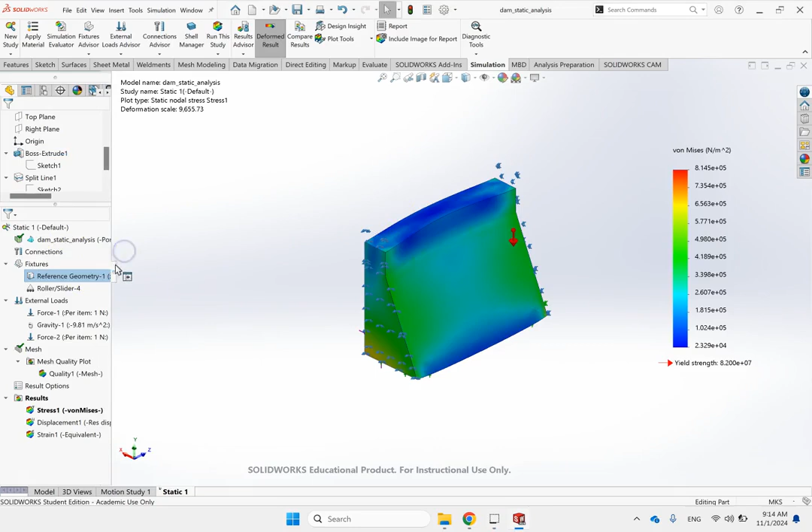Hello everyone. In this video, I want to show you a very simple static analysis of forces on a dam in SolidWorks. And the elements that I want to show you that are new to my playlist are advanced fixture or reference geometry, and a roller, as well as forces that are varying with location. They are non-uniform forces, which is the hydrostatic force behind the dam.

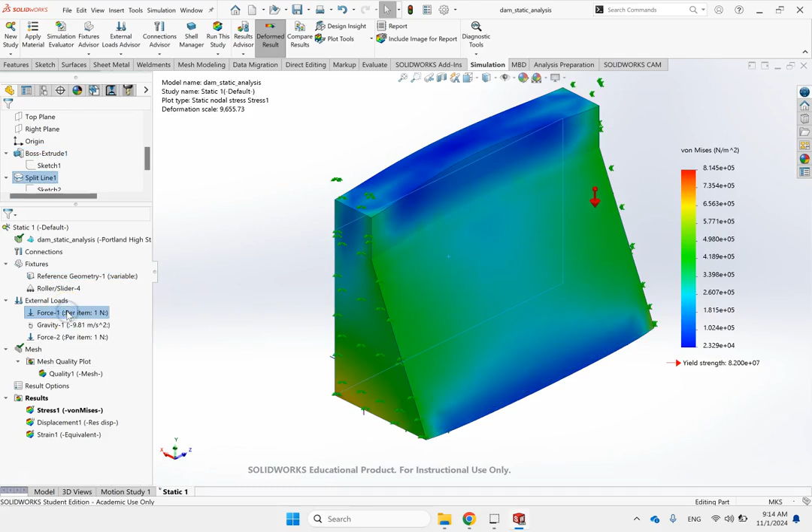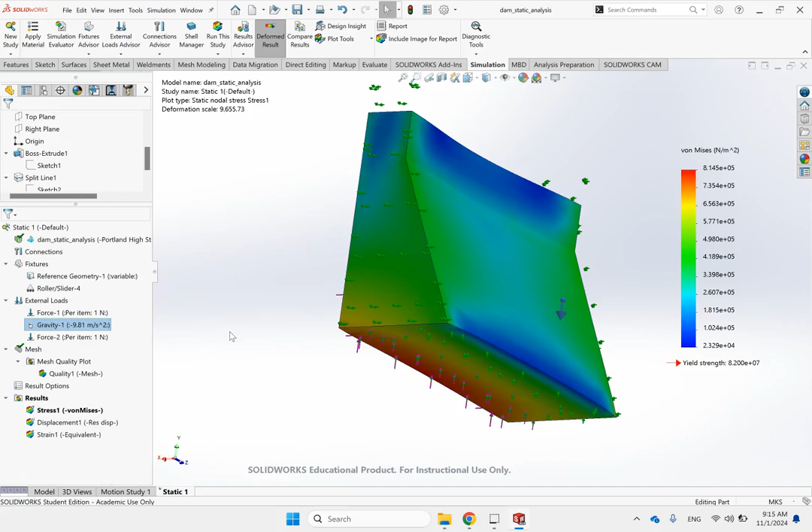Okay, this force here starts at the top of the water from zero and then goes down, and the force is rho g h, where rho is the density of the water, g is the g of gravity, and h is the height, the depth in water. The force that is due to water going underneath the dam, call it the uplift force, which you can see here, starts maximum at this bottom corner at rho g times the total height. Then as you go toward the other end and there is barely any water, that force gradually goes to zero. And of course the gravity.

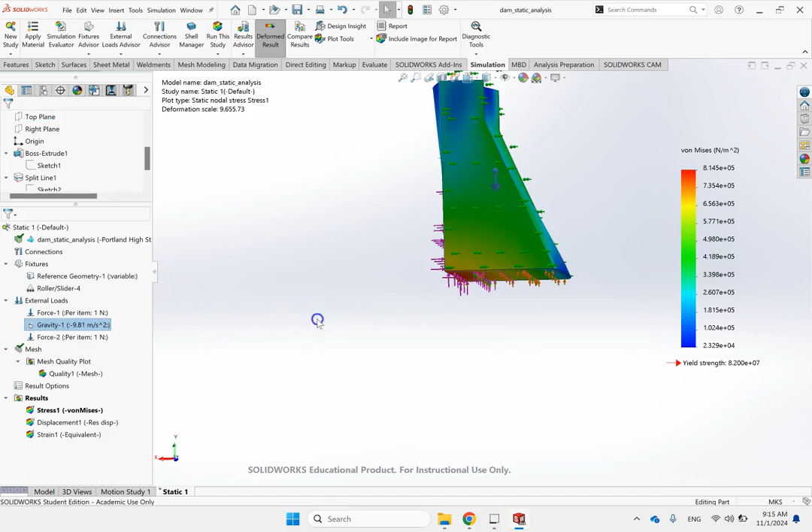So this is that. And one extra thing that I did when I started modeling this simple thing, I was looking at the material, and of course, when you go to the regular material of SolidWorks, there is no concrete. So I was looking into a way to add concrete material to SolidWorks, and I found that if you go to GrabCAD here, this person, I don't know if I can pronounce it correctly or not, Lala, I assume, he or she added this amazing file. So you can download this RAR file and then extract it.

And once you download it, let me show you. So here, it should be this one. Yes. So you need to copy this concrete SLDMAT. It's a SolidWorks material, concrete. It's a custom library. You copy this. And then you go to your program data, and then go to SolidWorks, and then copy it into custom material here. So that is going to add this custom library.

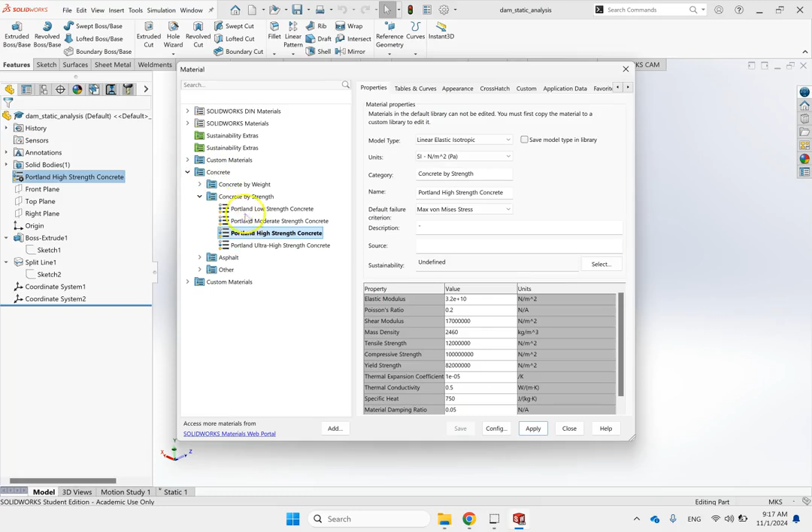So now if you go to SolidWorks, when you right click and you want to edit material, you should be able to go under custom material, and there is this library now called concrete, and there are several categories. There is even asphalt. Okay, and there's concrete by weight and concrete by strength. Here I used Portland high strength concrete. So this is another interesting thing that I wanted to add to this video.

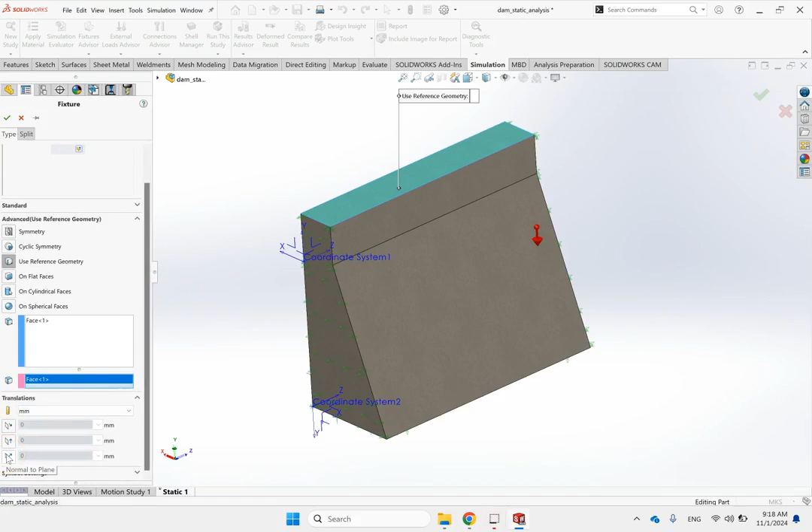So now what are my constraints here? On these faces, I added what we call an advanced fixture. So you go to advanced fixture, and then you need to pick a surface, let's say this surface. And then you can pick a reference. Let's just pick the same thing for reference. And then there are 3 directions for displacement, and you can constrain any of them to 0 or a fixed number if you want. So if I do this, in this X direction, all of the displacements will be set to 0. And then I can add this direction, which is Z. And now in the Z direction, everything is 0. But in the Y direction, everything is free to go.

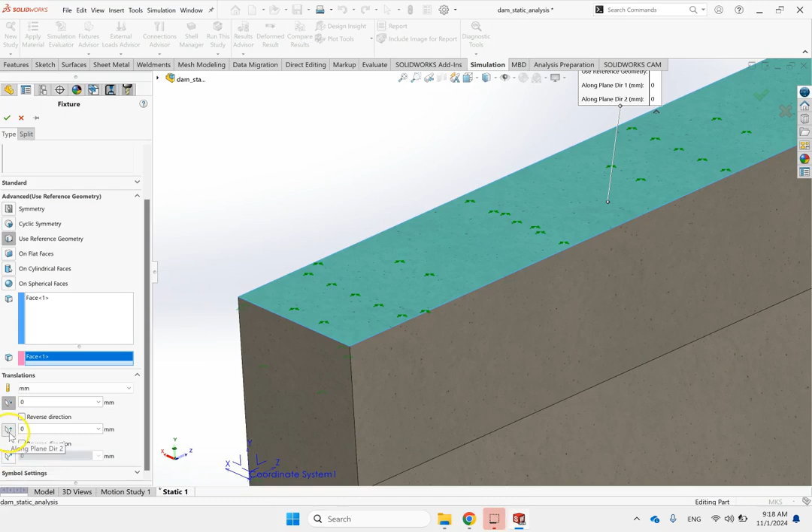Okay, so you can basically eliminate any of the degrees of freedom that you want with this custom fixture, because if you add the fixed geometry, it automatically takes all 3 away. If you do roller, then only the translation normal to the surface is going to be 0. But with this advanced one, you can do any combination that you want. So that's what I did to these 2 left and right surfaces.

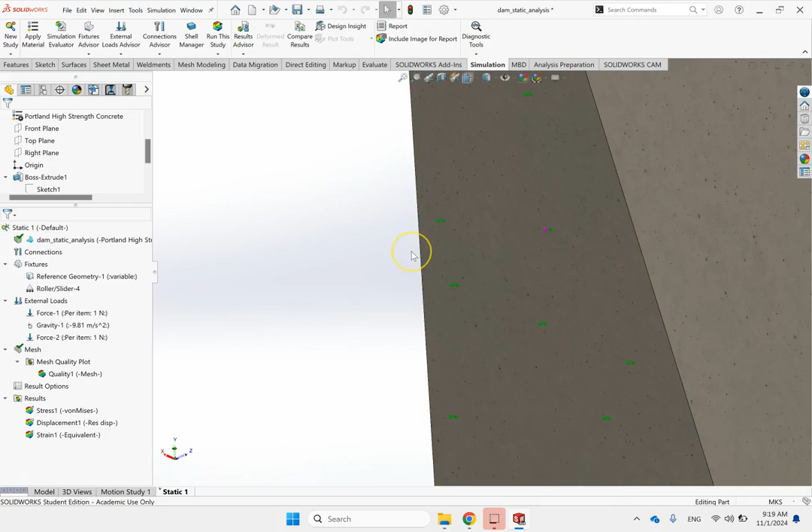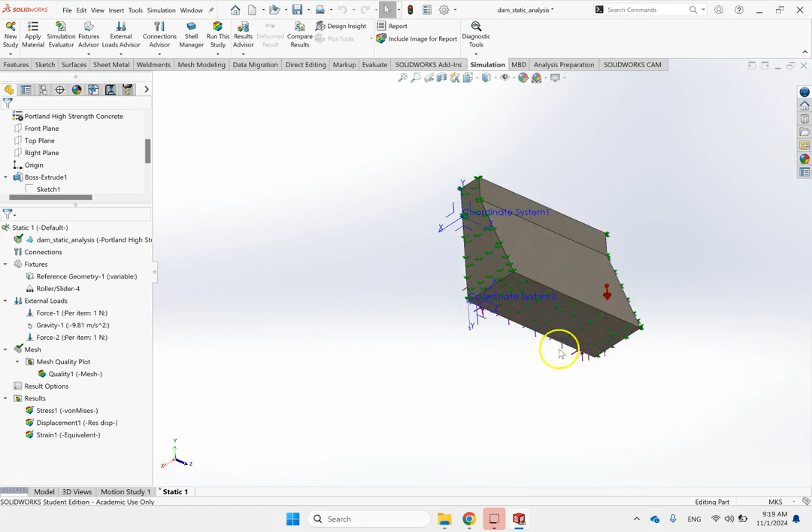Typically a dam is made between, say, 2 big sets of rocks in some valley where the river is going. So there is some normal force from those, and then because of friction, there is some lateral force here in the X direction, which doesn't let this guy move left and right. And then on the bottom, I added a roller. So there is some force from the foundation underneath, okay? And that is a simple Y force, as you can see here, these green guys. So it cannot go up and down.

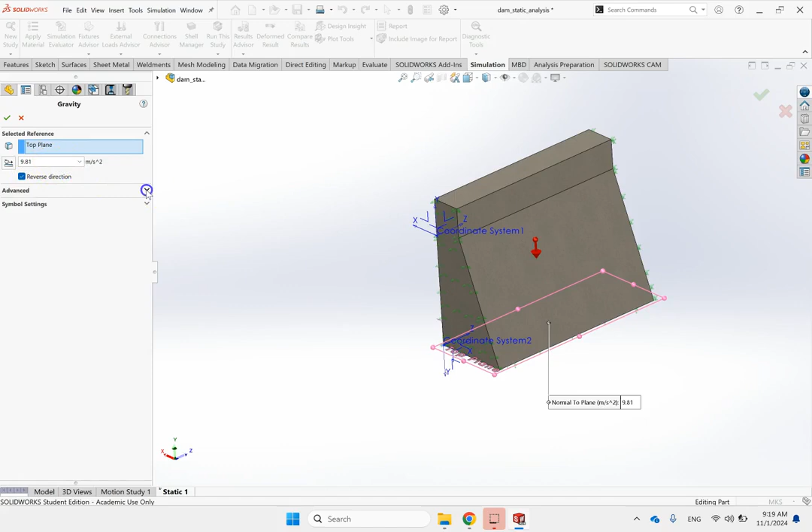And then for gravity, you just go ahead and add the gravity. You just need a reference plane. I pick the top plane and make sure the direction of this is correct. And here you provide the g of gravity. You can do more advanced settings if you want, but here it is good enough for me. Then let me show you how I did the hydrostatic force. So for hydrostatic force, I applied it to this portion of the surface. And that is another thing I want to talk about. That's called a split line.

So I applied it only to this portion of the surface, not all of it, which is about 30 meters. The whole height is about 40 meters. And so here you need a reference coordinate frame. So ahead of time, I created this coordinate frame in purple and set the origin of that right on the top of the water. And then here, instead of uniform, you check on this option that says non-uniform distribution.

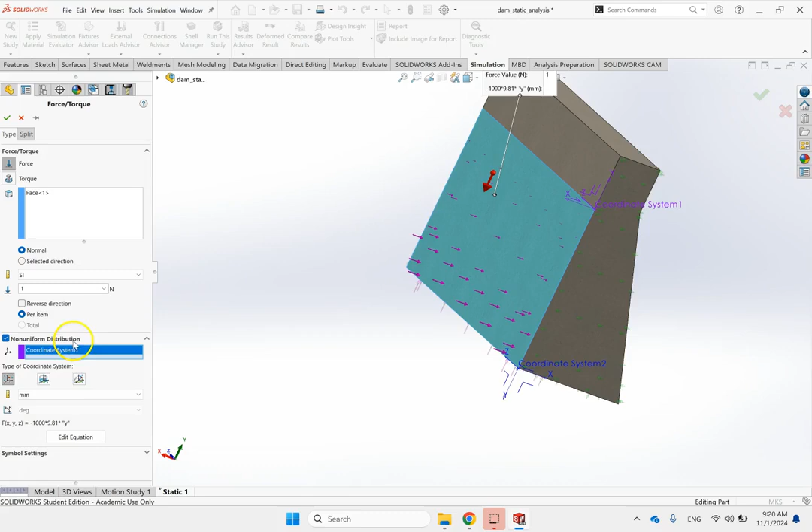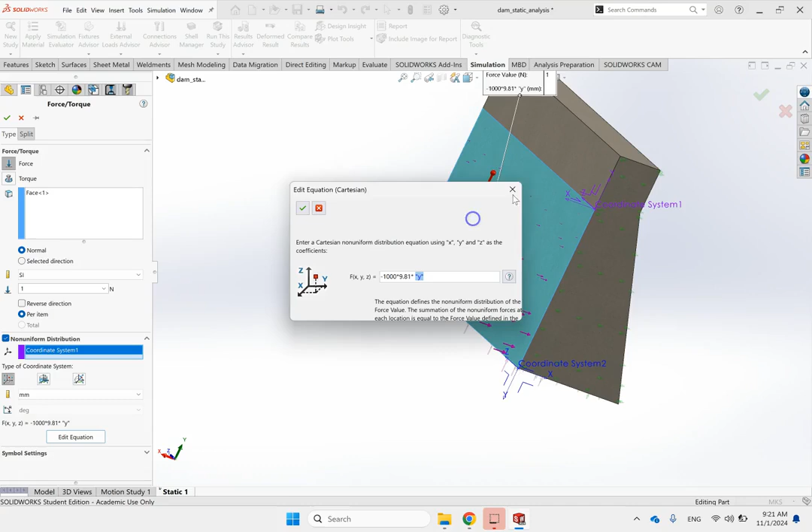You pick your coordinate and then you go to edit equation. And in edit equation, what do you provide? Here you provide your values, and here you see it is negative rho GH. This is rho, this is G, this is H, right? And of course here my units are in millimeters. So you see that at the top it's 0. As you go down, the force gets bigger, right? So it's a linearly increasing force, hydrostatic force.

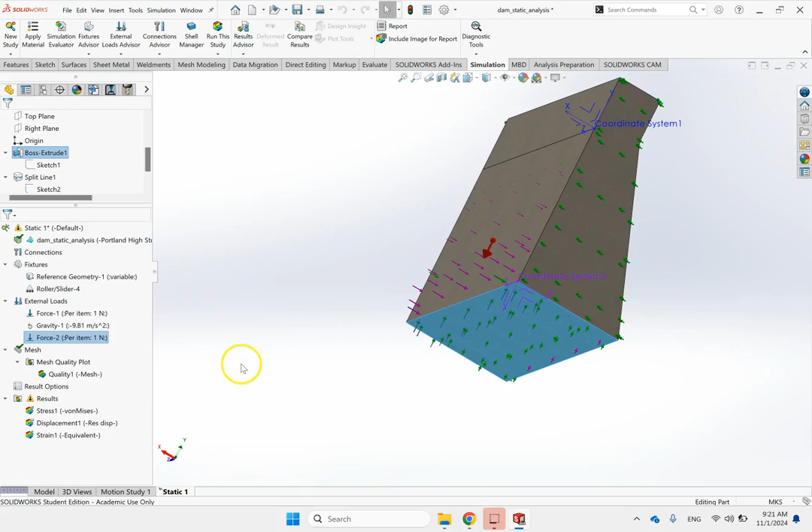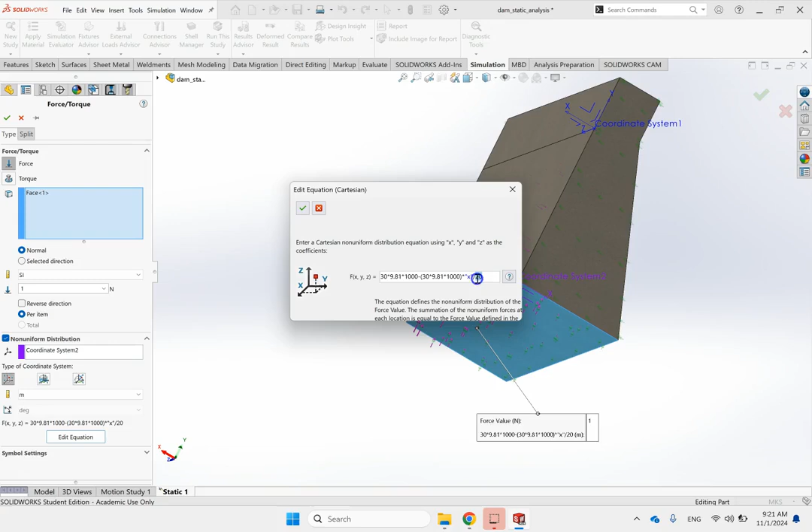And I did a similar thing for the uplift force underneath. So let's look at this one. Again, what you need to activate is this check mark, non-uniform. Here, I picked this coordinate frame at the bottom of it. The units are in meters, and the equation is this constant rho GH, where H is H at the bottom, 30 meters, and then minus that same value divided by 20, because the length of this bottom of the dam, this dimension here, is 20 meters. So I wanted to gradually go to 0 at the very tip of it.

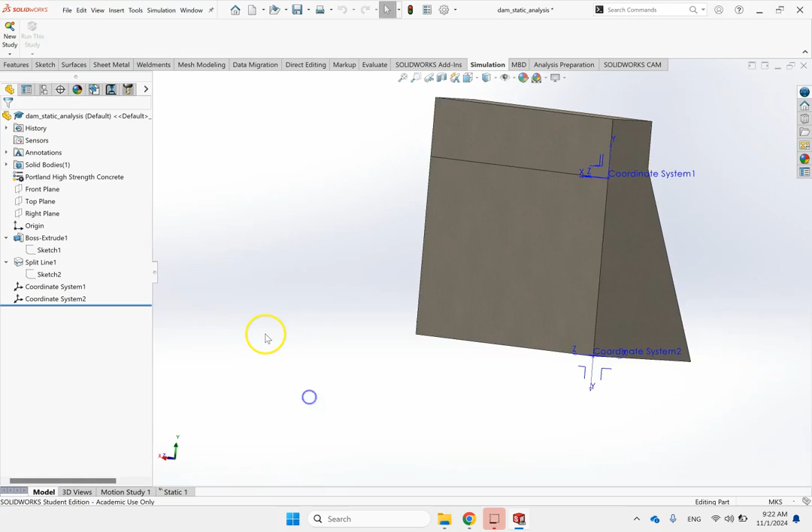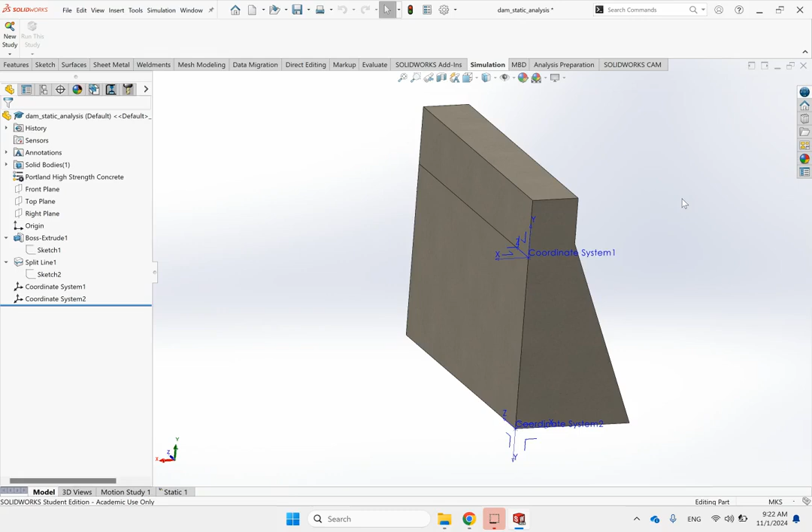Okay, so once I have all that added, now I can do my simulation. But let me show you this split line option, which is very important. So if you want to apply the force to only a patch of a surface, not the whole thing, and you don't want to add some extra material to the surface. For instance, I just want to apply force here. So I either have to create a very thin extrusion on this area, so I can separate it from the rest of the surface, but that is going to change a little bit the mass of the part, the center of gravity and everything. Or if you don't want to add any material, just split that surface into two subsurfaces.

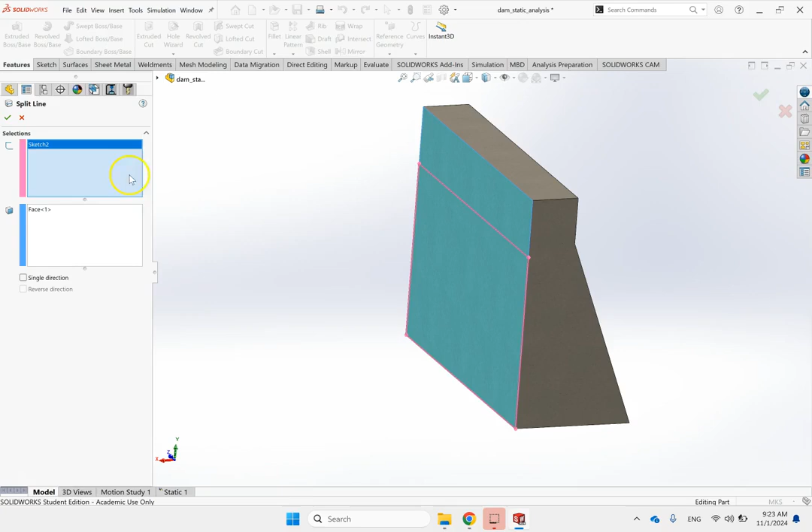And the way you do that, you just create a sketch. So here I went on that plane and created that sketch. And then you go under curves and pick this split line. Here you pick the curve, here you pick the surface you want to split, and then you use the option projection. And once you do that, it is going to project that sketch onto the surface and break down the surface into two parts. You see here, that's my face, that's my sketch. I use projection, and now look, my surface is two separate parts. So I'm going to apply it only to this part here.

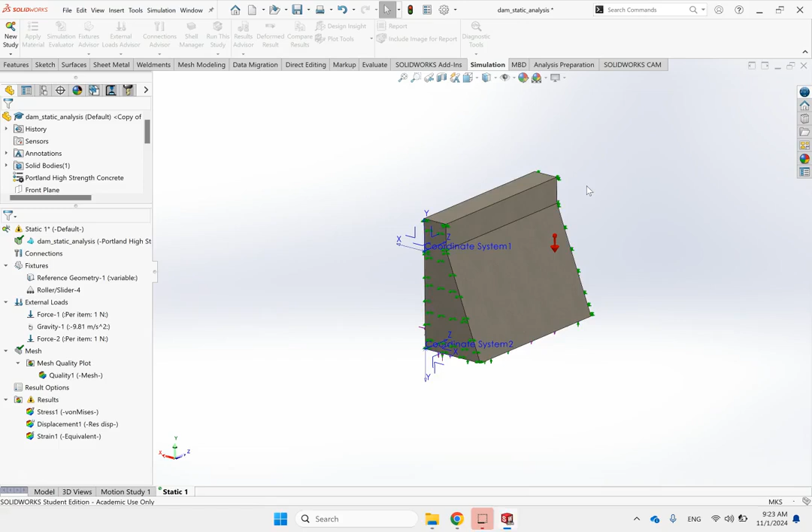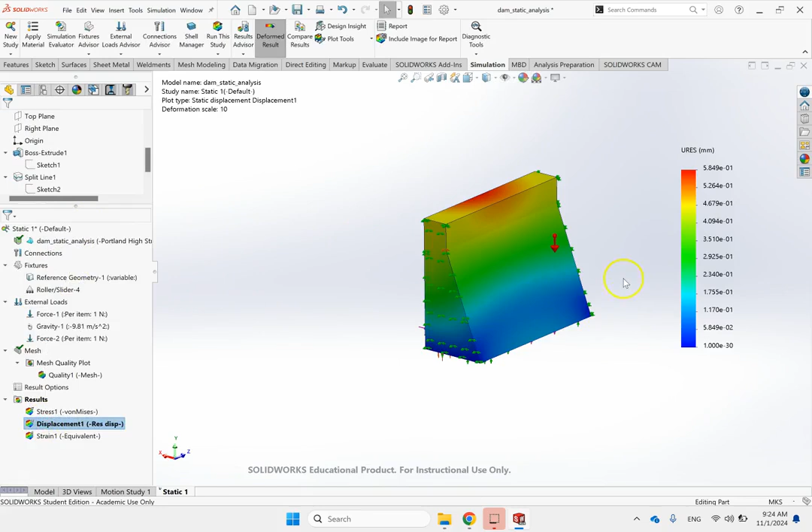Okay, so once everything is set, your material, your forces, everything, then you can go ahead and run the analysis. And let's see what we can get. There we go. So these are the stresses, and these are the displacements. Of course, if you don't change the scale factor, it is going to show some huge displacement, which could be misleading. You see the automatic one is 9,600 times bigger. If you do true scale, it's just going to be 1-to-1. If you want, you can use a user-defined scale, like for instance 10 times, so you see some displacement, although it's not what happens in reality, but you might see a little bit of something that can happen.

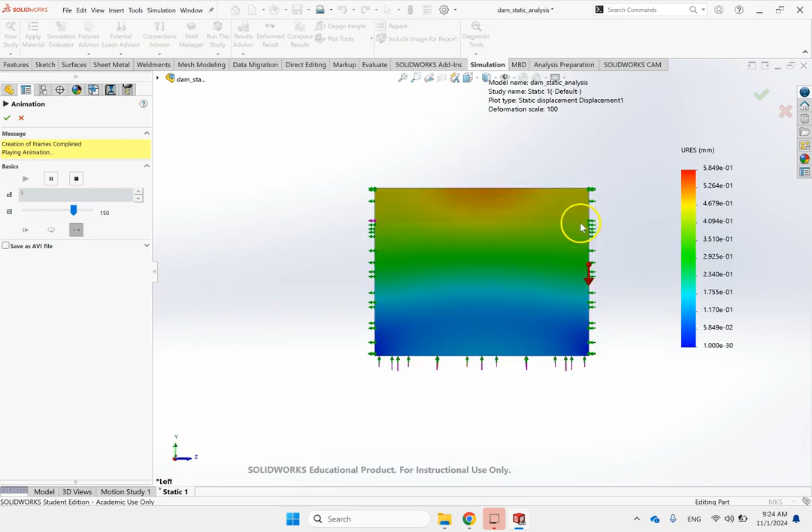So this is what is happening. Again, very hard to see at that scale. So you might go ahead and bump it up a little bit more, but keep in mind that you're just scaling it. In reality, this kind of deformation, where this goes down, does not happen.

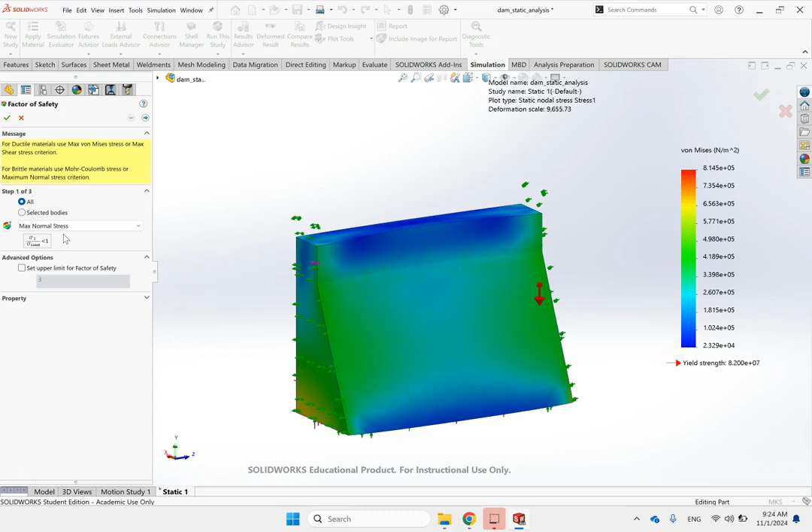Okay, so you got the stress, you got the strain, you can add the safety factor if you want. You can go and look at the safety factor, and in this case, I use the maximum normal stress because it's a brittle material, and I create that, and you see that my minimum safety factor is about 13 and my maximum is more than 570. So my design is completely good. Of course, this is an over design, 13.

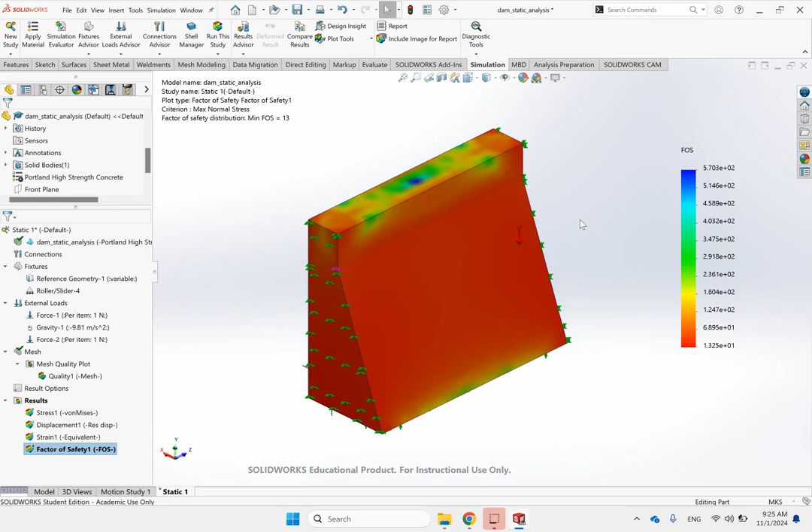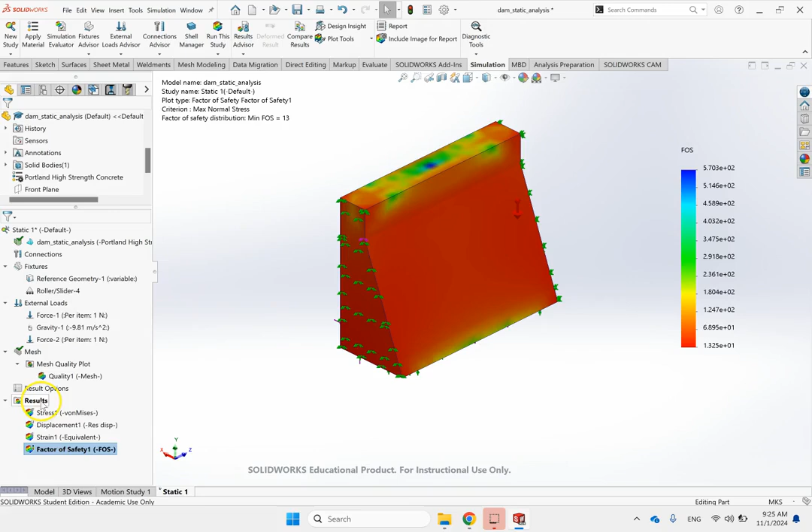But remember, these are not the only forces that can happen to a dam. There are wave forces from the water. There are earthquake forces and so on. And so if you want to have a good dam, of course, the design should be way more complicated than this, but I just wanted to show you some simple elements that you need to do a relatively realistic analysis.